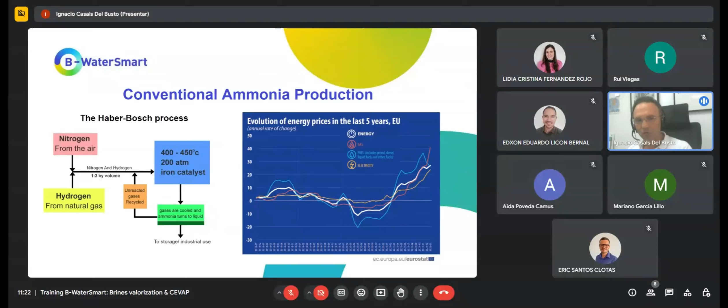So what's important about this conventional process is that it's using natural gas and a lot of thermal energy in the process. So considering the evolution of energy prices and also the evolution of gas prices in the last years, it is quite obvious that this conventional process means a problem.

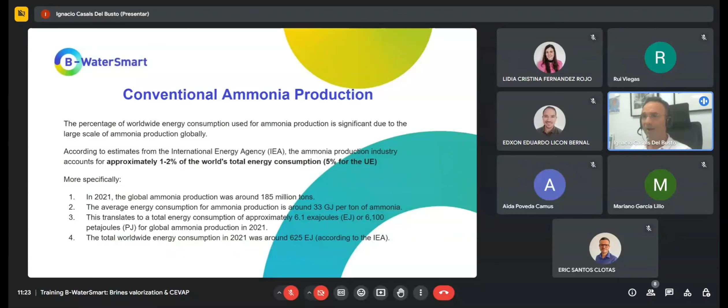So, a bit of context. I already introduced the wastewater treatment plant of Rincón de León in the first presentation, so I will not stop in this slide for long. But what's most important, as I also mentioned, is that in the sludge line in the wastewater treatment plant of Rincón de León, the sludge is sent to be dried and incinerated at CEMEX. And in this process, we also have a reject current with an ammonia-rich flow.

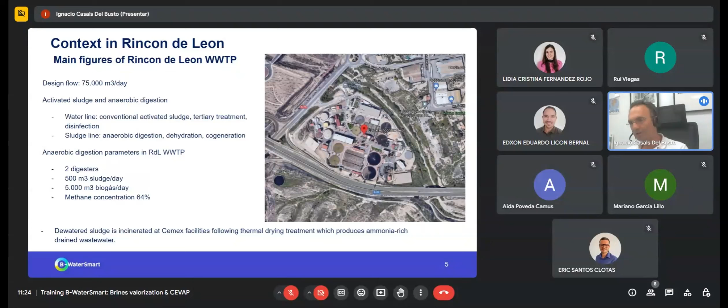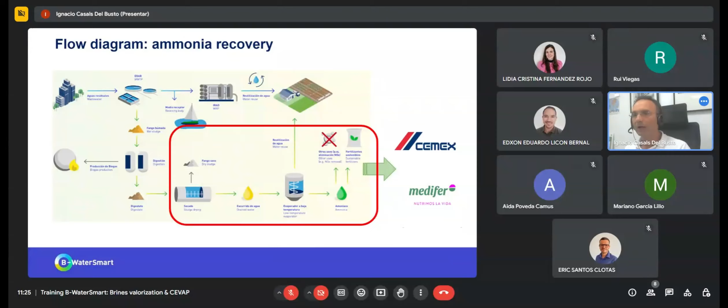So, an overall view of the process and of the flow in the wastewater treatment plant shows that after the sludge drying, we get the reject, the drained water, and we will be using this low temperature evaporation process, this CEVAP process, to produce ammonia, intended for two main applications. One of them is producing fertilizers, and for that, we have collaborated with a local fertilizer producer, Medifer, and the other one is the NOx abatement in the cement plant of CEMEX.

So actually, there are 2 points in which we have a current rich in ammonia. One is after the mechanical drying of sludge at the wastewater treatment plant, and the other point is at the CEMEX plant, in which we have this drying process using waste heat of the cement production. In both cases, we have a similar order of magnitude in terms of ammonia concentration.

But we finally decided to run the pilot using the CEMEX reject water. As at the cement plant, we have the waste heat that would decrease OPEX. And it would also mean that the ammonia would be used on site for the NOx abatement.

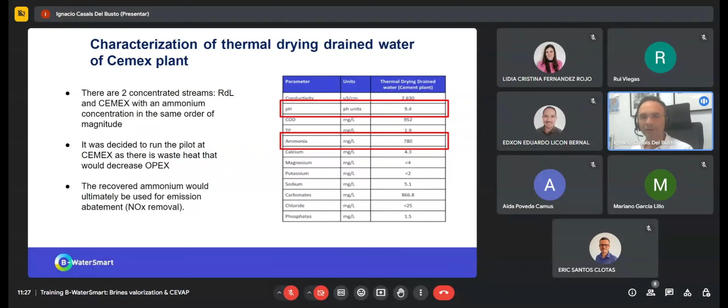A bit more in detail, the cement production plant requires roughly 2.5 cubic meters per day of commercial ammonia for the abatement of NOx in the kiln emissions during the cement production. The usual ammonia concentration in commercial solutions is something around 25%, that is to say more than 200 grams per liter. Keep this figure in mind, please.

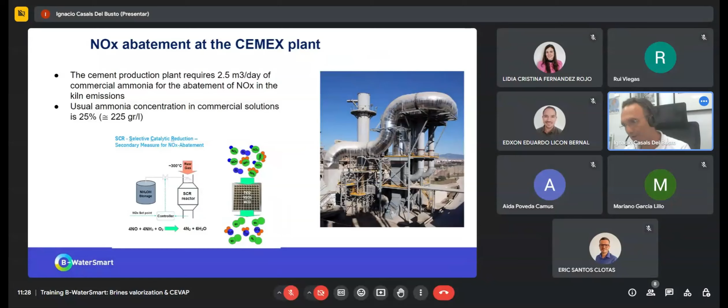And the process is actually very similar to that in diesel cars, because it's actually the same problem. Ammonia is mixed with the NOx current, and then by using a catalytic reduction, we get to transform this NOx into nitrogen, avoiding the pollutant emission.

Well, we have already seen how the CEVAP technology works. It's a simple evaporation process with low temperatures, usually between 80 and 90 Celsius degrees. As it has this low temperature requirement, it can be driven by low grade waste heat. Another advantage is that it uses replaceable cartridges, which means that at least in theory it has a low maintenance cost, built with plastics, easily scalable.

And in the case of the pilot in Alicante, we actually use the same unit that was used in the pilot previously presented, which has a capacity of 100 liters per hour, meaning 200 liters per hour of feed.

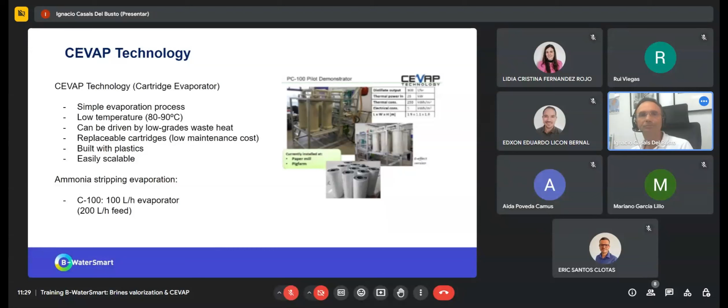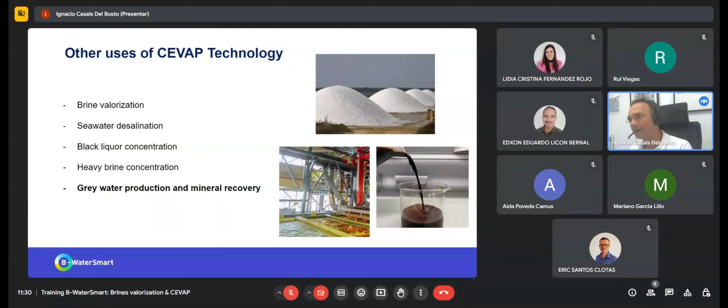I would very quickly like to mention that this low temperature evaporation technology has many other uses: for brine valorization, for seawater desalination, for black liquor concentration in wastewater treatment, for the concentration of heavy brines, and finally the one that is more related with what we are presenting right now, for grey water production and for mineral recovery. As far as we know, it had not been applied directly to ammonia recovery previously.

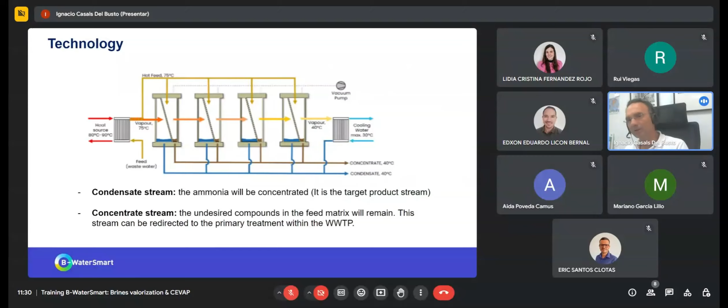Well, this image has already been presented, so I would like only to highlight a couple of differences. First of all, in our case, the stream of interest will be the condensate stream, differently from the case previously presented. And then, as for the heat source, even though the cement plant has waste heat available, due to the location in which the plant was set we had to use a hot water boiler during the pilot. So in our case the heat source was a hot water boiler for the test.

So well, this is how it looks. This pilot plant is quite small. It's something like 4 square meters in area, 2 meters height, and it was located in the wastewater treatment plant for convenience reasons, very close to the mechanical sludge dewatering unit, even though the water that was finally used to feed the system came from the cement plant of Cemex.

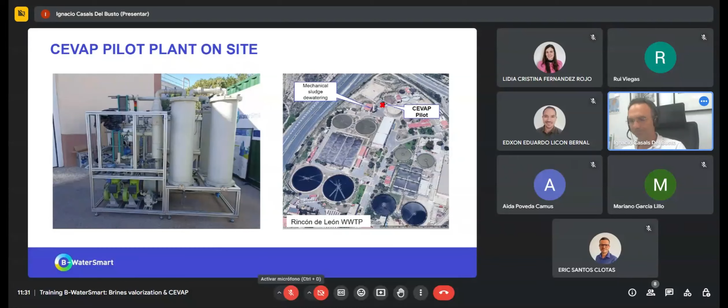So the first tests we conducted with the pilot plant were batch tests at different temperatures, and basically what you see here is that the results are very similar no matter the temperature we use. In terms of concentration, the ammonia concentration in the feed, in the condensate and in the concentrate is very similar. The only difference actually is the flow, that is to say, the time required to get a certain volume.

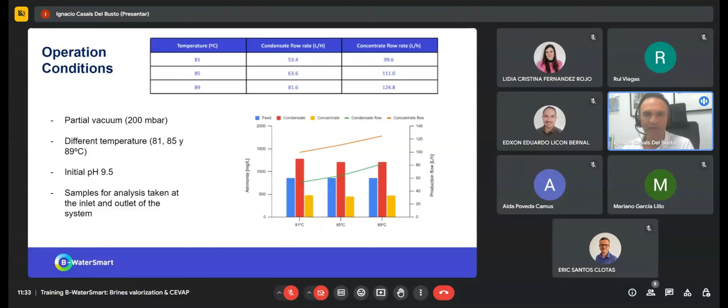We operated the pilot plant in a partial vacuum condition, 200 millibars. The initial pH was around 9.5, and the system does not allow us to take samples other than at the inlet and at the outlet of the plant. Well, as you have seen, in this batch process we are not able to increase the concentration of ammonia at the outlet of the system, no matter the temperature. So we decided to run the process in loop, on a cycle.

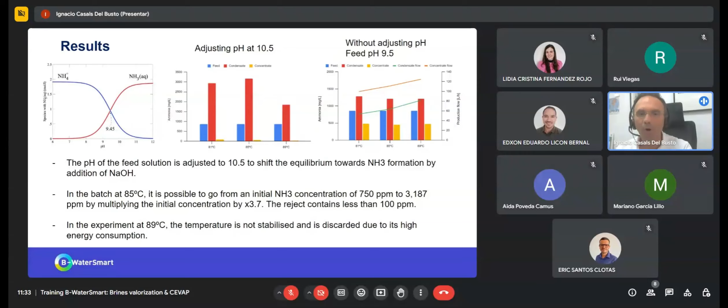And first of all we also decided to change the pH point, to shift it above the equilibrium point between ammonia and ammonium, which is 9.5 roughly. So by using sodium hydroxide, we shift the pH to 10.5 in order to get more ammonia instead of ammonium. So with this, the result was that we were able to go from an initial ammonia concentration of 750 ppm to more than 3000 ppm. That is to say, we multiplied the initial ammonia concentration by almost 4. And we were able to reduce the reject concentration to less than 100 ppm.

You see here once again, in the graph in the middle, that at higher temperature we have a worse result. We are not sure of the cause for this, but it seems that the temperature was not stable, and also as this high temperature means higher energy consumption, we finally decided to discard this option.

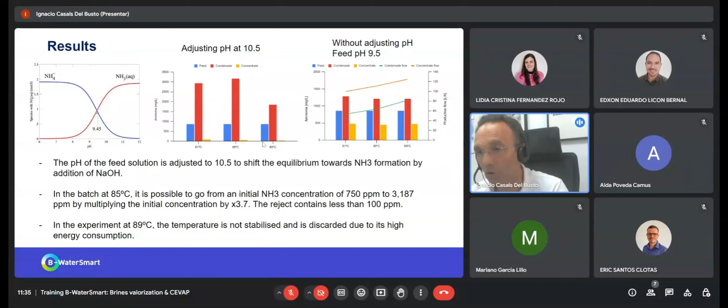Finally, while keeping this higher pH, we also decided to run the process in loop. And for that, we introduced the output of the first batch as the feed, and we kept the system recirculating for more or less 8 hours. In this table, you can see the results of this. We were able to get a condensate with 5,000 ppm, which is much higher than the initial result, but obviously it's still far from the commercial solution of 25%. We got a recovery rate of more than 40% of the initial ammonia.

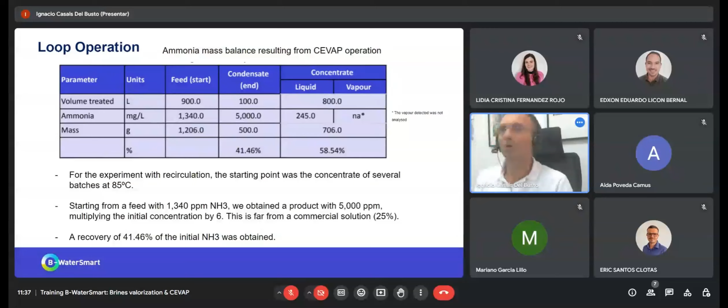And obviously, during this process, we got a much reduced volume of product. So after 8 hours, the initial volume of 900 liters was reduced to only 100 liters of condensate. There were some losses of ammonia we were not able to quantify in the concentrate as they were in the shape of vapor.

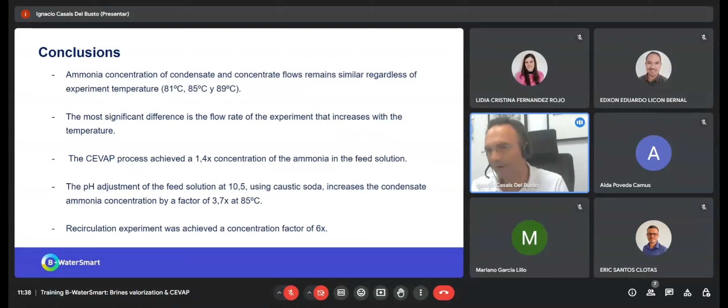So as conclusions, the ammonia concentration of condensate and concentrate remain similar, as we have said, regardless of the experiment temperature; only the flow changes. The CEVAP process achieved an increase of 1.4 in the concentration of the ammonia in the feed solution. By adjusting the pH, we were able to increase this concentration by close to a factor of 4 at 85 Celsius degrees. And by changing the process to a continuous recirculating experiment, we increased the initial concentration by a factor of 6 in 8 hours of operation.

So, as next steps, we aim to perform an evaluation of the economical and technical viability of the full-scale implementation of the CEVAP process at the cement plant of Cemex, considering the available waste heat of the cement production, the capex and opex of the system, and the long-term ammonia concentration variability, because depending on the sludge drying operating conditions, ammonia concentration can change along the year. We also need to check the usability of this low concentration ammonia for NOx abatement.

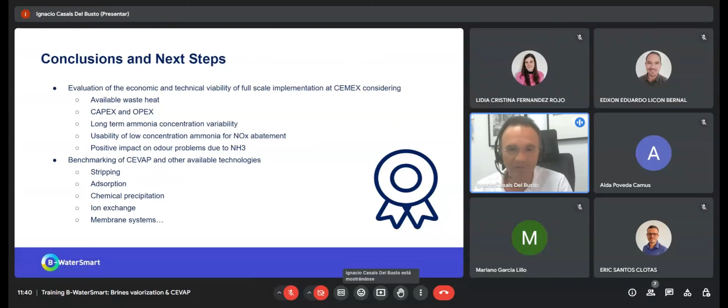And finally, on the positive side, also the impact on odour problems that we currently have at the sludge drying facility due to the ammonia presence. On the other hand, we should also perform a benchmarking of this solution, CEVAP, against other available technologies for ammonia recovery, such as stripping, adsorption, chemical precipitation, ion exchange, or membrane systems. So this is it.